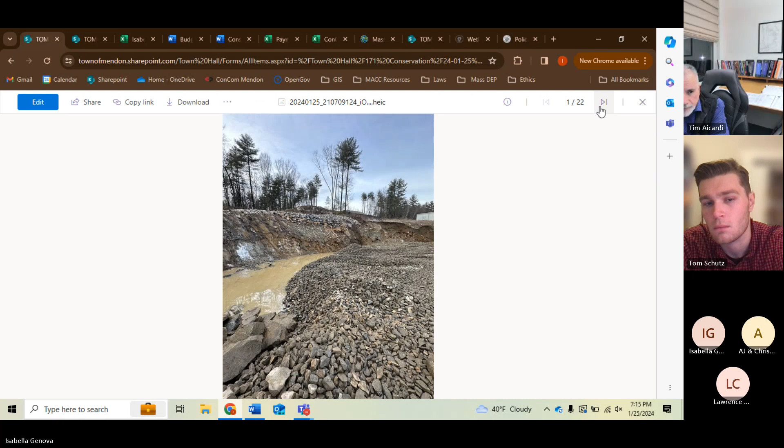As Isabella said, they've started—they had some more ledge in one of the corners. They're going to start construction on the continuation of the stream bed that goes around the parking lot, I would say in the next week or two.

So I still don't understand why I'm getting an enforcement order. I've done everything correctly on the site and you guys want to issue me an enforcement order.

Okay, I'm a little bit confused. We will answer that question. Goddard, do you have anything in response?

Do you mind if I just share my screen? I want to pull up the notice of intent plan so we can remind the commission what was approved in the first place. I have a colored up plan just to make it easier for everybody.

Okay, can everybody see my screen here? Yeah, I gotta go on. Yes, can everybody see it? It's so small, but yeah. Is the site plan up? Yes, okay, so just going over existing conditions.

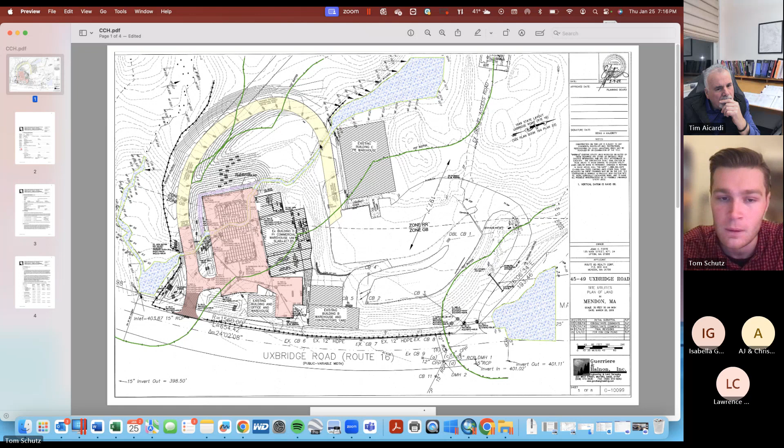This is the large hill with the existing warehouse at the top. We have an existing BVW system to the north of that, and then we have the intermittent stream currently running out of that system right there. We have the proposed access road, which was approved by the commission, that goes all the way up and around. As Peter was saying this wasn't allowed, we did get the approval from the Conservation Commission to do the access road all the way up and around and clear this entire area. You can see the intermittent stream running down through this section here, which would be underneath the proposed basin.

This area right here is currently where that stormwater basin that was constructed to stop any sediment from going into the BVW is currently in place. You can see the large grades up here where that hill is currently in place, which is conforming to the existing conditions in the field today.

And then we can see this is the stream bed in purple, which is currently being constructed. We got the approval from the commission to replace this 282 feet of the old stream to reroute it around this area and replace it with 240 feet of stream. That takes time, and you can see it's currently going to be rerouted where the current basin is located, and John has said that is currently being constructed.

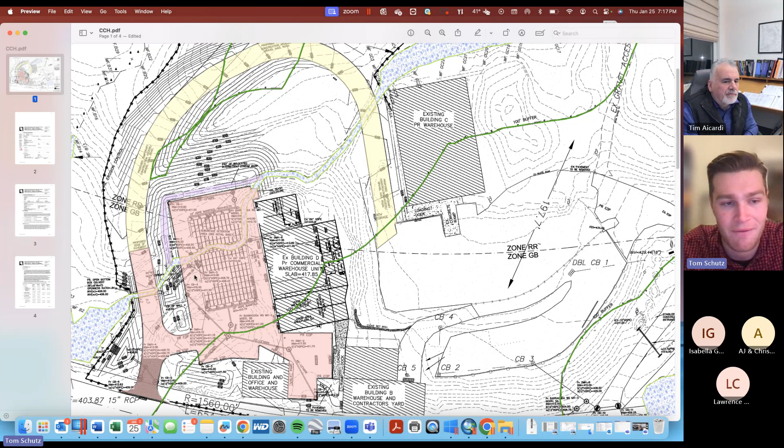We're conforming with the order of conditions. I have the order of conditions right here—that was the approved plan. Here's the order of conditions to show the alteration that was approved by the commission.

282 feet of linear stream that was going to be altered was going to be replaced with 240 feet of linear stream. So we're doing everything that was approved by the commission and going further by making sure that the stormwater is clean before it enters the wetland, prior to having any kind of sediment spill like we did in the past. So that's just what I have to say on that.

Furthermore, the bordering vegetated wetland down to the south that had the silt outbreak, we spoke on it last time. It's a minor dusting in that. We don't think that at this point there should be any kind of action taking place to remediate that silt that has entered that wetland, specifically because there's too much water in there. Any kind of remediation effort would lead to more impacts to the BVW and then the downstream wetland resource areas. So we recommend that we wait until the summer and dry conditions and then proceed with any cleanup efforts that might be needed, if any.

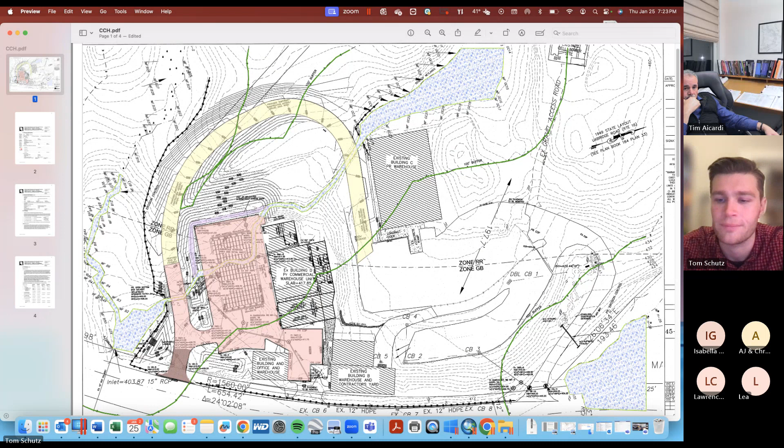Well, I want to redirect. The specific topic we're discussing at this point is whether the commission will agree to the recommendation that Isabella prepare an enforcement order with a specific set of items. So I want to hold off discussion on what Peter just raised until after we finish discussing the enforcement order.

Well, I had something, but let me go back to Isabella because I made her wait. I think it is valid that the upland has been clear cut as well.

Okay, so in terms of your response to John and Tom, John was saying he doesn't see why an enforcement order is required. So can you speak to why it is helpful for you as our conservation agent to have that document as we move forward for the duration of the site?

The enforcement order can be updated after every walk we go on, and it will just be a living document for the town. It doesn't get filed with the state or anything. So it's just allowing me and you and Tom and Goddard to agree on whether it's a light dusting. I think there's more than a light dusting, but again, there's standing water and it's very murky. So if it turns out to be more than half an inch, we'd need a restoration plan.

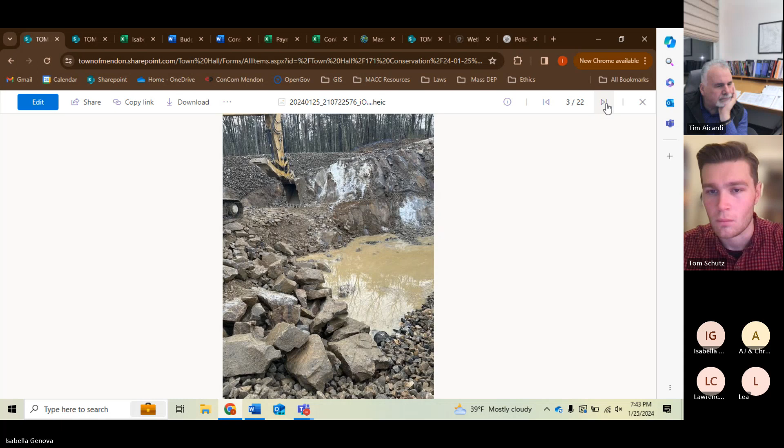You gotta bring that down 3-4 feet to the water level? Yeah, that has to go down to the level of the bottom of the swale, which isn't as far as the water level there, but we probably have to go down another 3 or 4 feet. So we do have a large hammer on the site - that's the soft ledge in that area, not the hard ledge, so it takes maybe a couple days to get it.

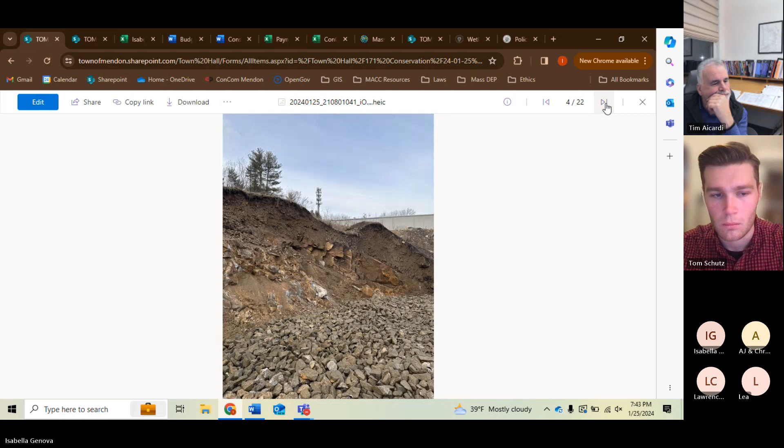Susan, did you have a question? Just a question - you mentioned underground structures, could you just go over that real quick? Yeah, so on the original plan you'll see infiltrator units - big drainage units that go under the pavement to store the water. And then there's stone that also takes up volume underneath that, so that's what that is.

I think that's along the edge of the area - that's the area that we're filled in with stone, along the edge of it, right Isabel? Yeah, so that'll be the stream bed, close to where the stream bed is gonna get built up. But that stream bed there has got to probably come up another 3 feet to where the stream bed's gonna be.

Sorry, could you go back a picture? Go back one more - are you going to be taking that banking down anymore? So that's flowing from the right-hand corner to the left-hand side, right? Correct. The stream is gonna be brought up a couple feet, so there'll be more drop, and we have to shape that. So that's gonna come up and then we'll shape a stream bed in there and that'll have plantings.

And it's not gonna leak out the side? No, we're gonna line that. So we're having problems with the top section leaking out, so we're gonna line that with a liner. What do you line it with? We line it with, like, they have a basin liner - it's like a rubber thing. We can do it with clay, but we did the other one with clay and it's not all working.

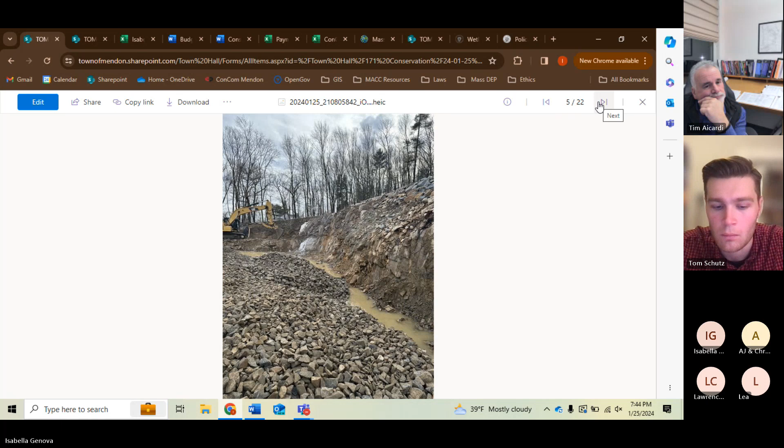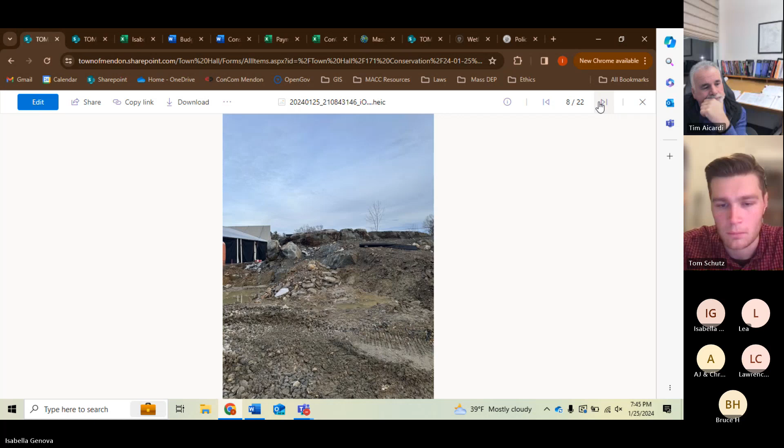So John, I should say Mr. Chairman, could the applicant speak to that ledge banking on the right-hand side of where the water is now? Is that the height of it, or is that coming down in order to gain that 3 foot you're looking for? No, so that back bank now is where it's gonna stay, except for that corner, that'll be raised up and then the stream will be in front of that. So we had to take the ledge out so we could shape it - you can't shape the stream, you can't do it in a ledge slope. And then that'll be cleaned up and it'll be left a 1-to-1 ledge.

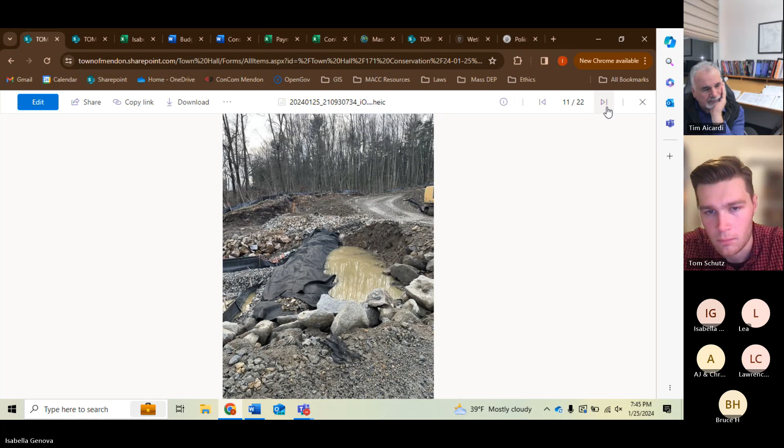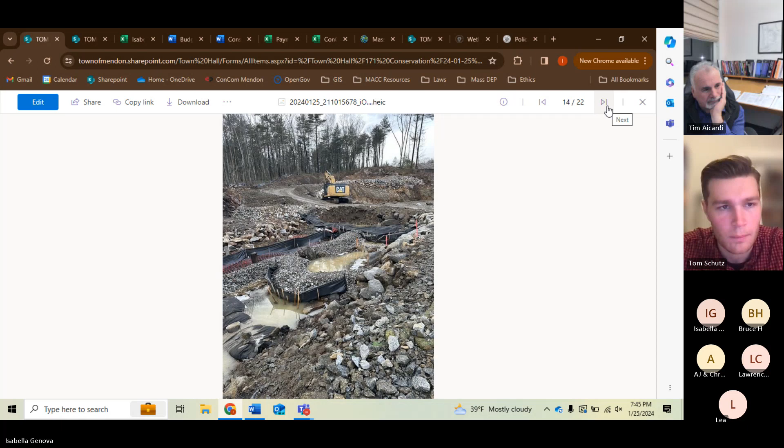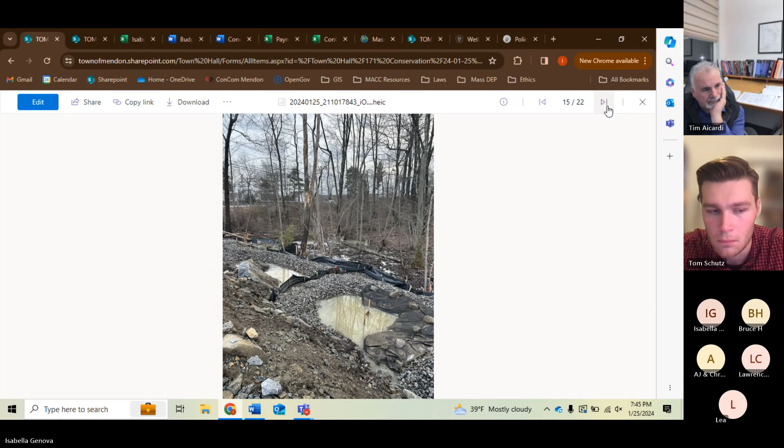Those are the check dams and plunge pools that you saw last time with spillways coming down, and there are flock blocks - flock blocks in the bottom of every one of those. There's 4 flock blocks in most of them, 2 in a few. And there's flock blocks at the outlet where the stream comes down into the basin.

Not quite sure where that is - this is still one of the check dams at the higher point, so the wattle's been destroyed. Is that a wattle? Yeah, it might have got pulled out. There was a lot of areas that we pulled out stuff to replace it with other things.

So here's the bordering vegetated wetland. This is the turbidity and the silt in the water that we were hearing about. That's downstream today. And is that right down at where Route 16 is? Yeah, so this would be the culvert that then empties out into Lake Nipmuc.

That's a direct shot to the lake, right? Yes, almost submerged. It goes to a drain manhole on the other side of the road and then a pipe out to the lake. It's a little higher before the culvert.

Was it flowing through the culvert today? Look at that, that's the other side. Can you ask the applicant if the flock blocks have anything to do with this? Because he said it was running clean the last time we were here.

With the melt we had overnight, we've done everything we possibly can to get that fine silt out of there. The flock blocks aren't doing as well as you wanted them to? There's nothing else we can do. We're responsible for the procedure and doing the things, but we can't guarantee the outcome.

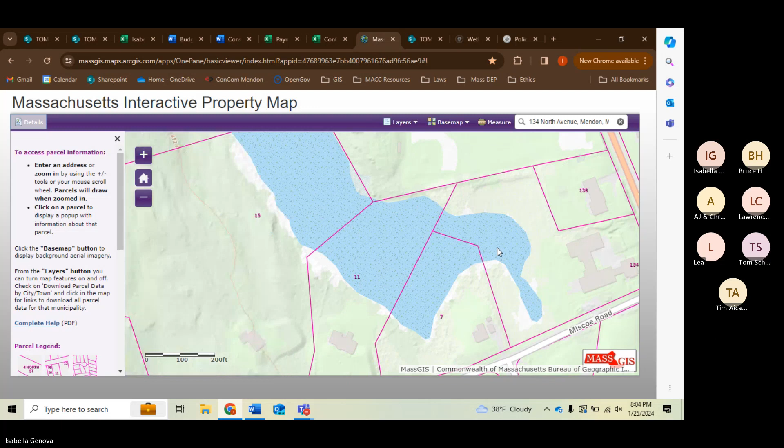Where's the dam? Right there, yeah. There is a 4 feet by 8 feet concrete block with a pipe underneath the dam going through. What happened is the beavers built their dam right here, and they completely raised the water level up before it got to the pipe that would have allowed the water to drain out. They completely blocked all drainage there, in addition to knocking down trees all along the edges.

What happened with Kevin's property is I have a high bank, so I only lost about 2 or 3 feet. He had a much shallower slope, so when the water level went up 2 feet, he had like a 4 or 5 to 1 slope, and he lost a whole lot more square footage.

So the other thing we will be discussing with the ANRAD is this area here is on the USGS survey maps from like 40 years ago. However, I believe what you were talking about is you go back and look at the aerial photographs - I remember driving by here, this was not wet, this had been turned into fields.

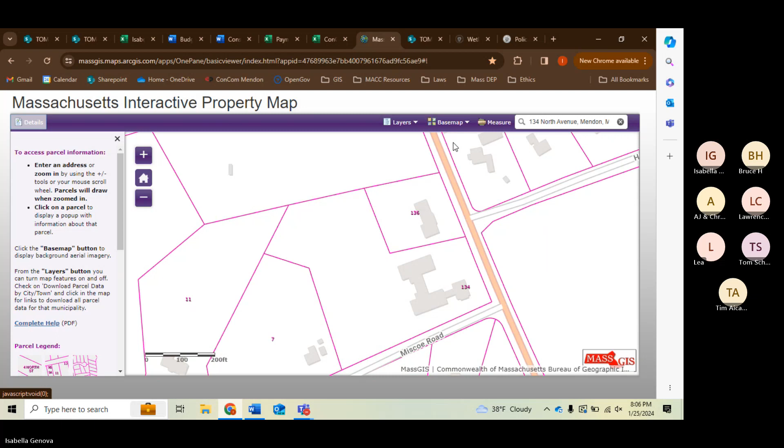So it could have been filled circa 1960, you don't know. Or if you look here, this is fields, this is grass, not wetlands. So this area here was pretty dry. Since we didn't do a full assessment until 2020 when the house was being done, we weren't able to officially say that, but we can retroactively look at it.

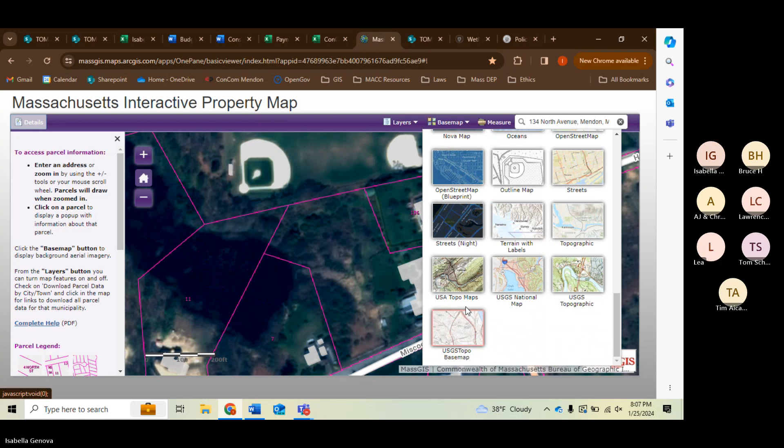Can you turn the base map off and scroll out again? Which one is it normally? Scroll out a whole lot more. Yeah, now push it up.

What happens is here's Miscoe Hill. Water runs down this way, and this is where the Miscoe Springs thing was, but all of the water that comes down this way flows into here. And then it either goes down here or it came to here. This pond here is the headwater of Muddy Brook.

What happens is it starts in here, it flows into a second pond on the other side, and then it flows on down. So probably a long time ago, this was an active channel, but this area has been dry pretty much since. You can see the contour lines. There was an area coming in here.

So the question is, the road is usually the high spot and then it crowns both ways, but whether this might have historically flowed from south to north, and then now it's development. It hasn't done it in at least 10 years. And it fit, yeah.

That's something we'd be able to review when we get the official ANRAD thing coming in. That's also the low point in the road right in front of there. And there's been drainage put in now where that used to puddle across the road that ties into the catch basin. So that doesn't puddle there anymore. So that could have been a contributing factor.

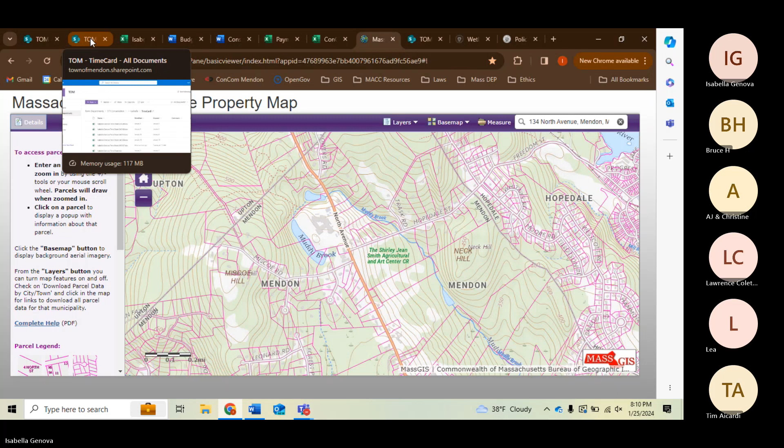Okay, so Lawrence C., are you here for a specific agenda item? I am here just to hear about 23 Cape. Okay, and the third one is Bruce H. Are you here for trees? I'm here to listen about 23 Cape Road. Oh, okay, well, then that's what we'll talk about next.

So we will now move to agenda item 6, 23 Cape Road, review discussion with town planner and junior town planner on January 17th, and take any action required. Isabella? Yeah, Carl and I met with both the town planner and junior town planner, and they provided us with documentation for the soccer field, which was reviewed by the town's engineer, Graves Engineering. And so they've looked at the pavement and they think the swales are functioning well.

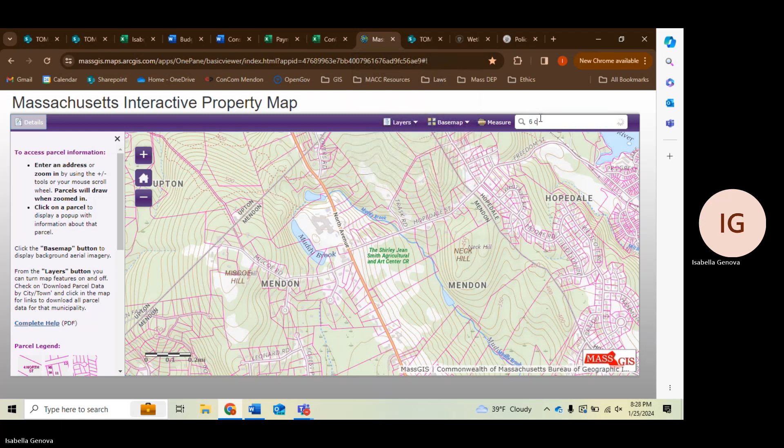Let me clarify from my phone conversations with him: it is not currently flagged as wetlands, it is not listed as an intermittent stream, and it is not marked as such on our current maps. The concern of one of the people who came out to give him an estimate was, in his opinion, that he wanted the Conservation Commission to review it before he gave an estimate. So the question before us is, do we consider that, even though there's nothing on here, it's just a regular...

Well wait a minute, there's a culvert, so there's a stream. Isabella, but the other side of the road has it marked. This is marked stormwater outfall, it's an outflow, the storm. Did you see any vegetation that would suggest wetlands?

This is a question she'll be better able to answer after she finishes her training. I've got to believe there's a wetland on the other side of that somewhere that's directly connected. But in any event, he's got the trees marked.

Why can't he cut down the pine trees? No grubbing, no stumping, he's not going to damage anything. That's the question at hand. He is asking us to put something in writing that he can give to the tree removal person, so the remover doesn't want to get yelled at by us for removing something in what might be a wetland.

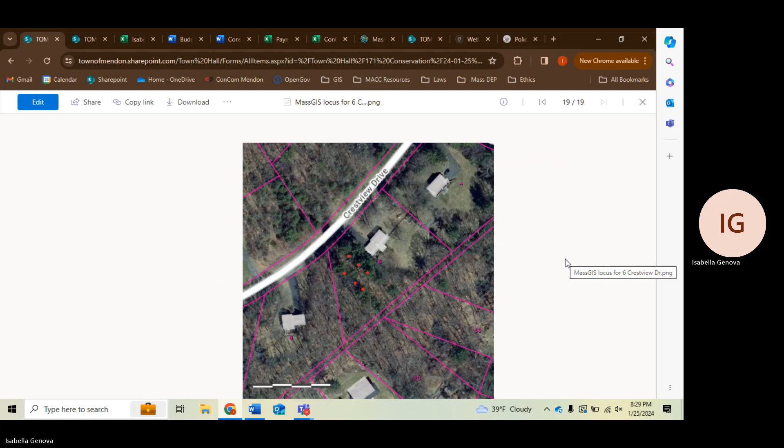That's good, I'm glad he reached out to us. So the question is, my recommendation is that we say it's a drainage ditch. It's upstream of anything, so it's not something the Mendon bylaws would be concerned with. And therefore we would write something to the effect of, go ahead and remove the trees.

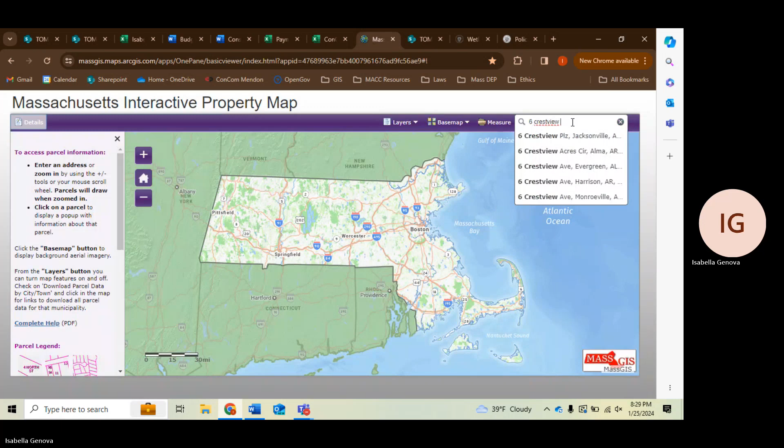You can grind them down, but don't rip the roots up. That's what we usually say. And in terms of heavy machinery, it's not a buffer zone, but you should be sensitive to the fact that you really probably don't want to mess up the existing drainage ditch or you'll have a bigger problem.

No, that culvert, that Crestview, that's not that old subdivision. That looked like an old culvert. So is it...

What I would ask, if people disagree with that, we can continue talking. If there's no objection, I'd entertain a motion to find this a negative determination and authorize Isabella to write something up for the homeowner.

Bigger fish to fry. Okay, well, I guess that brings me back to how I should respond to tree inquiries, because some towns, they're all gonna be different.

So then do we want a threshold of five trees or more would need an RDA, or some towns just write a tree removal inquiry form so that all the information is presented to the commission at the time of the meeting. I want to punt that particular conversation until you have some free time to work on it.

Our rule of thumb is, if it's a safety concern anywhere near the house, if the homeowner wants to take it down because he's afraid of branches, that's okay. If it's aesthetics, or because they want a view of the lake in the buffer, no, that's different. In this case, those trees are large enough that they would endanger the side of the house the kids sleep on. That's the reason. Gotta love a pine.

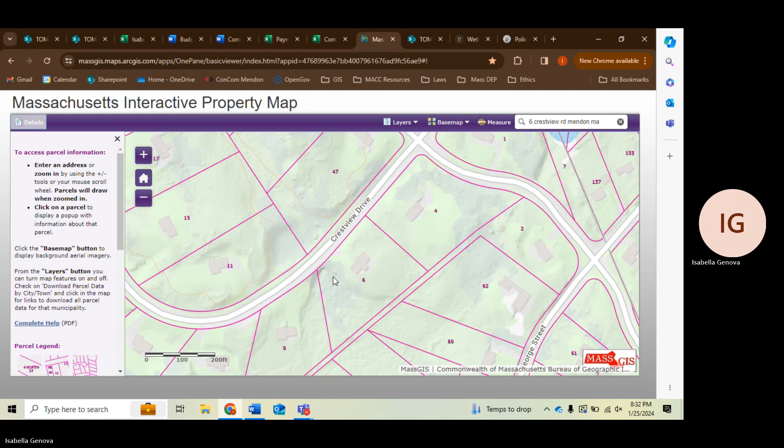Yes, the reason for having a threshold is, at some point, if someone wants to go into a wetland and take out a couple trees, that's okay. If they want to do some serious logging, we would ask them to have a forestry plan. But in this case, he has six trees that are definitely a safety hazard.

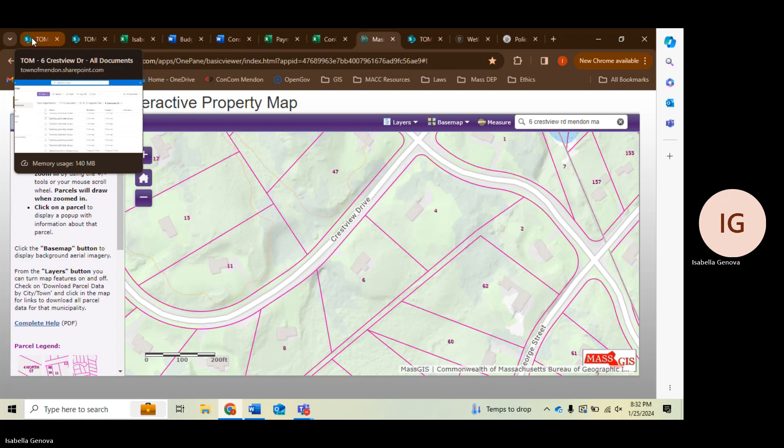So do I have a motion to find this a negative determination of applicability? So moved. I second. Okay, moved by Peter, seconded by Leah. Any discussion? Okay, all in favor? Aye. Tim, are you still there? He left. Okay, so we still have a quorum.

So the question is, do we want to put in there that no removing of the stump, you can grind them but not remove the stumps? Yes, that's the usual. So that's what Isabella needs to know.

Well, isn't it that we're finding it's not really a wetland? So we can provide that as an advisory opinion, but it's up to the homeowner and the tree person to decide how they want to remove the trees since they are a safety issue, unless it's deemed wetland soils. Well, Isabella went out and it's a drainage ditch. Okay.

Like I said, my whole goal on this is to make it fair and even for everybody. All right, Isabella, if there's any questions like that, I'm happy to go on site walks because I can identify certain things. Between you identifying plants and Susan identifying rocks, it's an education going between.

All right, easily distracted. I know where the water table is. Susan's just like me too, like she sees a rock and she's like, I see a plant. Her best friend. Okay.

Moving on, agenda item number 7, 5 Morrison's Drive, review status of site and take any action required. Is this the one where he said there was stuff leaking into his yard?

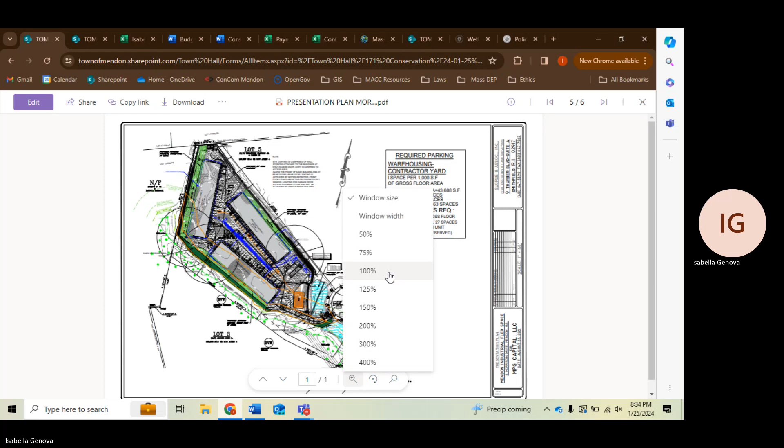So it's just that work commenced. What are they building there? Three storage units, and this was already approved. How much imperviousness is there? It's like almost the whole thing.

So this was approved, and these are things where I think the bigger sites could start having the plans on the website so people can look before they call or come to a meeting. That would make a whole lot of sense. It would be transparent.

So this went to the planning board but didn't come before ConCom? No, these are ConCom approved plans. Oh, we just didn't have them in the right spot. So when did they get approved?

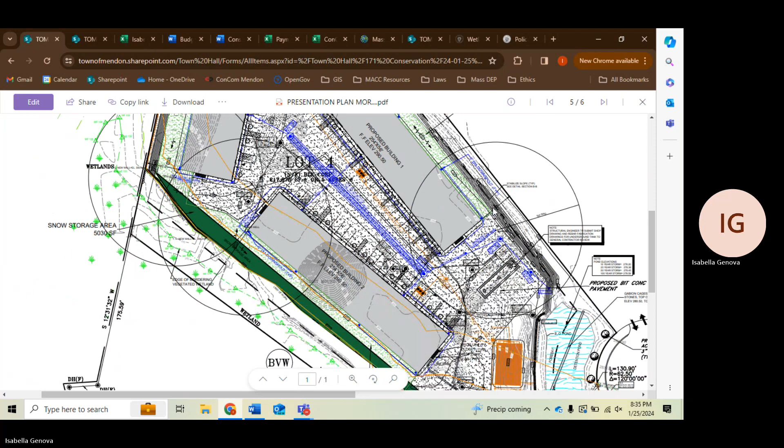I don't know, it's like back, I went to a bunch of planning board meetings on that. Okay, yeah, I can zoom into the date. July 26, 2021.

But the order of conditions is from 9/22, so a year and a half ago. So what should the homeowner do? There's nothing we can do then, because it's not jurisdictional. I mean, we can start doing site walks as we want to.

So I have to reply to the homeowner, the abutter. Okay, so there is an order of conditions, so we can reach out to the property owner at 5 or 3, asking for a site walk because we have a complaint from an abutter. Is that what the next step would be?

Yeah, there should be a sign up, right, a DEP number, there should be. So getting that confirmed as well. Any work being done, the siltation should be in and they should give us a call, right?

All right, so the action is we'll hear back on this in two weeks, after Isabella finds some time in her busy schedule to work on that. Okay, moving on to agenda item number 8, 13 Bellingham Street, review status of site and take any action required.

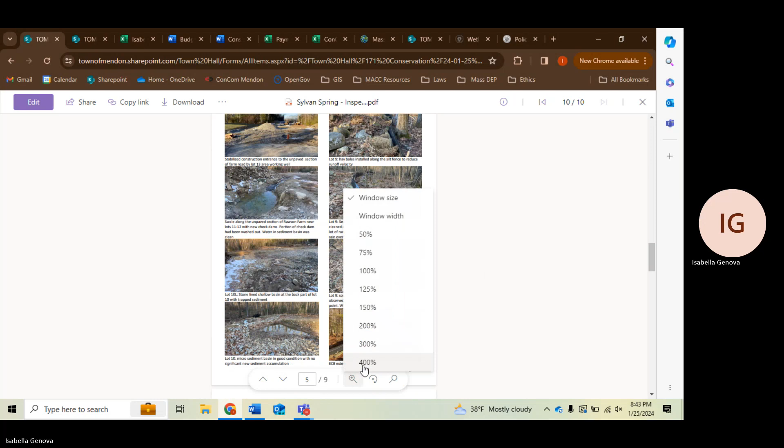Agenda item 11, Sylvan Spring monitoring, review site inspection report from January 11th, 2024, and take any action required.

Susan and I both participated. They had done a lot of work to clean out the sediment washout that was recorded in these pictures, and I think it looked much better than it had the previous weeks. They've also gone back around the whole site and hung up the wetland flagging and added new silt fence and wattles, so I think they've done the preventative measures that they needed to.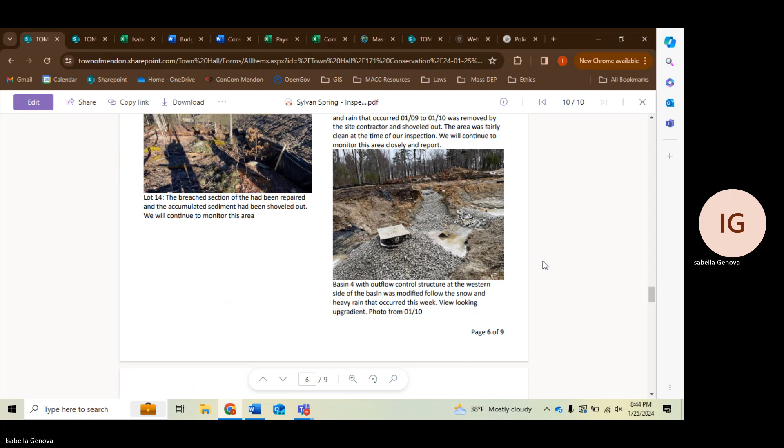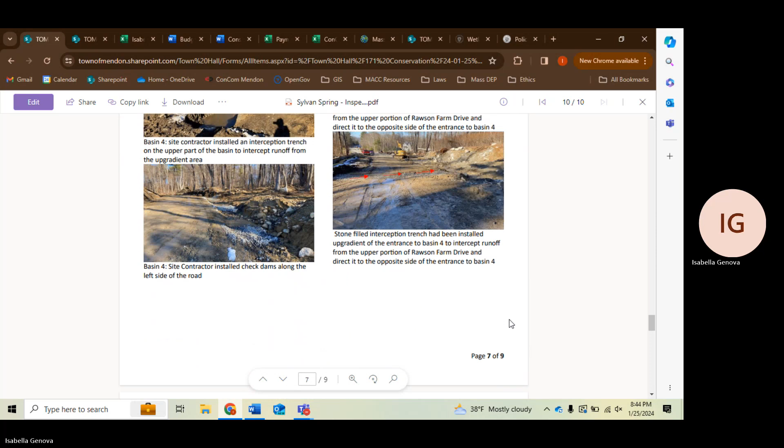What's the status of the Upton enforcement order? I think it's just open so that they stay in compliance. Is Mary happy with what they're doing on Mendon land? Mary wasn't at the site walk, so— okay. When the next site walk is scheduled, the usual notice will go out and people can see if they want to go as well.

Agenda item 12, Lake Nipmuc Task Force. Here's an update from Bob Sweet, including about installing a water level gauge, median high water level, and take any action.

Have you had a meeting yet? The meeting is scheduled for the 30th. I believe there's going to be a good showing. I believe Isabella, you're going to be there as well, right? Yeah. Will you have any information about the water gauges? We were talking about monitored ones as opposed to secured ones. Were you able to get any information on that?

Yeah, Dan Byer and I met, so we went over kind of what devices we'd want. So we both are prepared to speak on that. We'll look forward to hearing what happens at that meeting.

Agenda item 13, review building permit activities since last meeting. First one, COM 2312, 149 Uxbridge Road. Is this one officially dead? Has this been canceled and never should have been a building permit request, or is there some other status? I haven't released the hold just because John Erickson hasn't confirmed anything. Okay, so we'll wait for John to decide what's up with that.